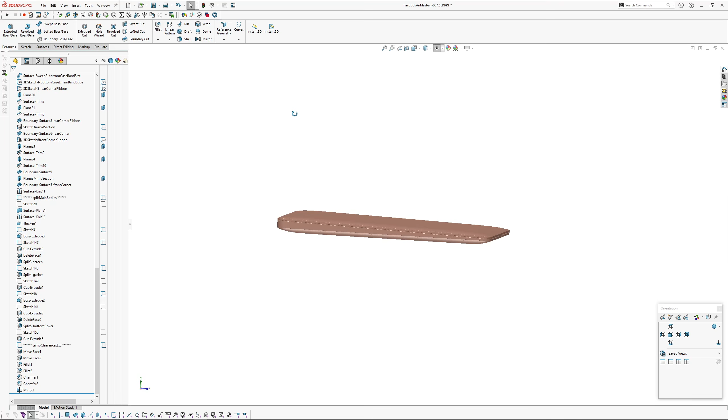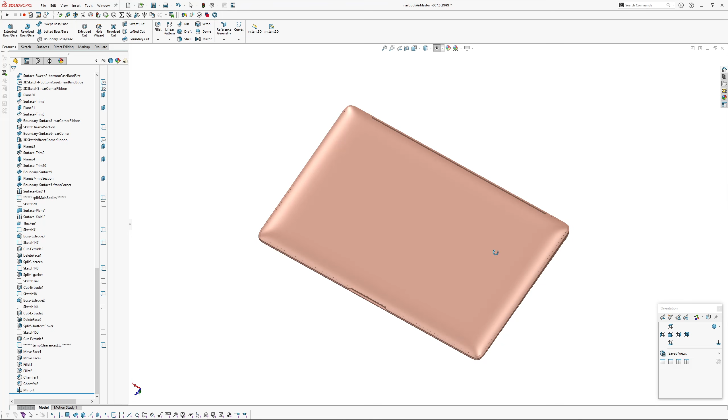Got a video today looking at the M1 MacBook Air. I've had a few quieter days with work, and I felt like working on something geometric but also with some surfacing challenges. So I've modelled up the main exterior form, and I'll probably follow up this video later with more details like the feet, and maybe populating the keyboard. We'll see how we go. Anyway, this is the result. I've tried to use G3 blends everywhere I can, so it's fairly smooth.

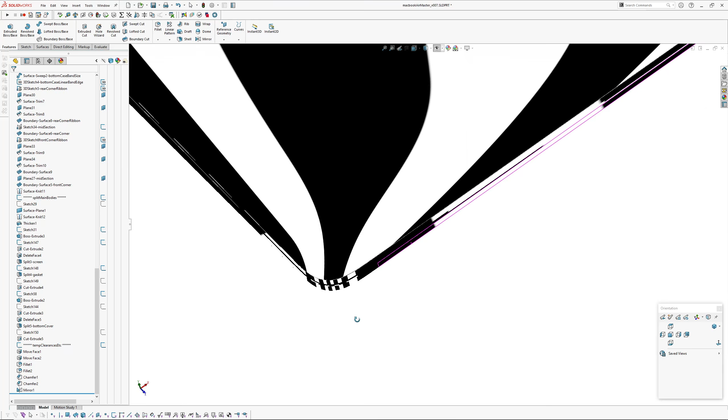As you can see here, this is the top, the lid, the screen running into the corner there. That's pretty smooth. The corners on top might look the same, but they're actually different, because one of the faces, the front face on this product, is angled, whereas the others, as far as I can tell, are perpendicular or normal to the desk.

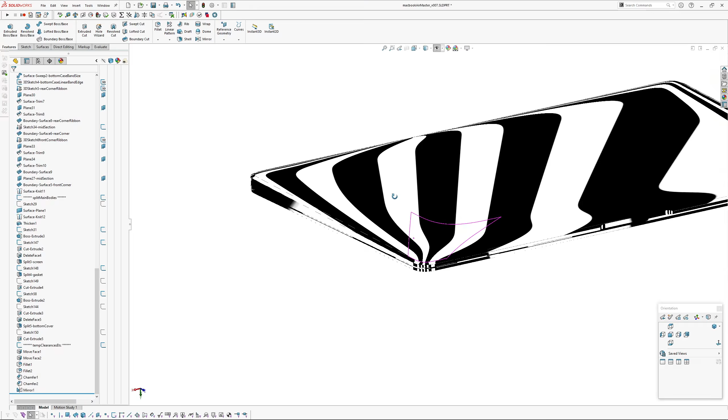So that's the front. On the back, I've also made some other discoveries about the product, which I'll get into soon. This edge band isn't actually continuous, there's a crease that runs between the edge, the outside case, and the bottom cover around the corners, whereas around the sides here, as far as I can tell, the edge and the bottom case are one surface, or the same surface split out.

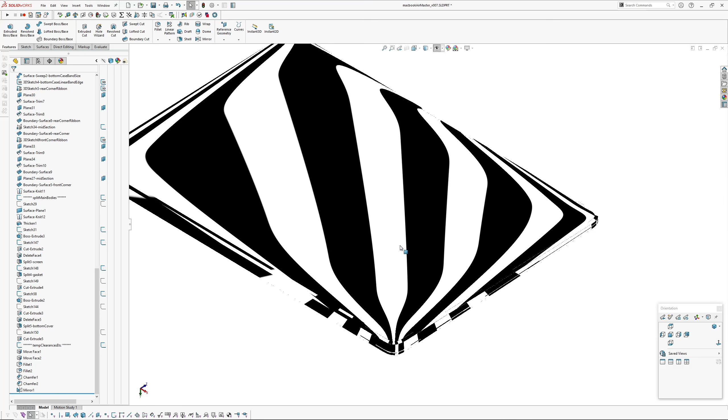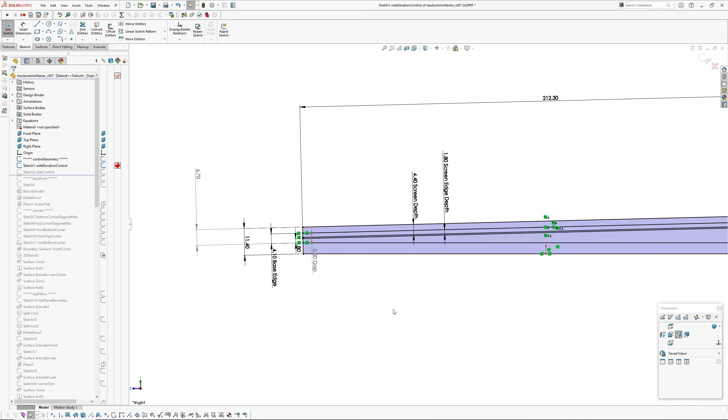Okay, I'm just going to roll back up through the tree and roll forwards and explain what I've done. First thing I did was survey the product and capture the main edges, planes, pivot for the screen, etc. I measured this as well as I could with a straight edge across the top and a vernier caliper, to try and find out where these virtual centers were, because obviously the top and underside roll up, and I've named everything in there. I'll upload this file in case anybody wants to have a look.

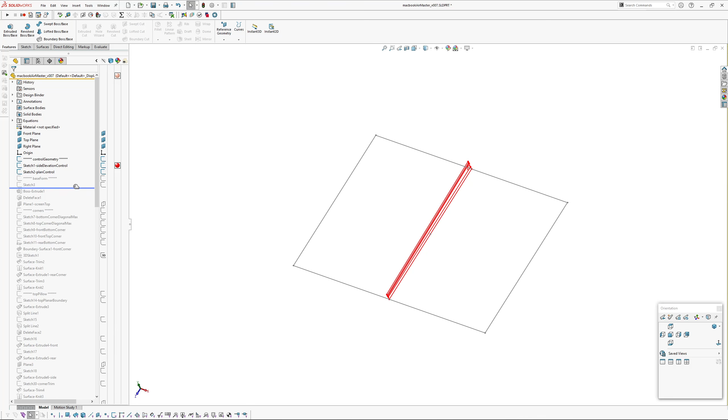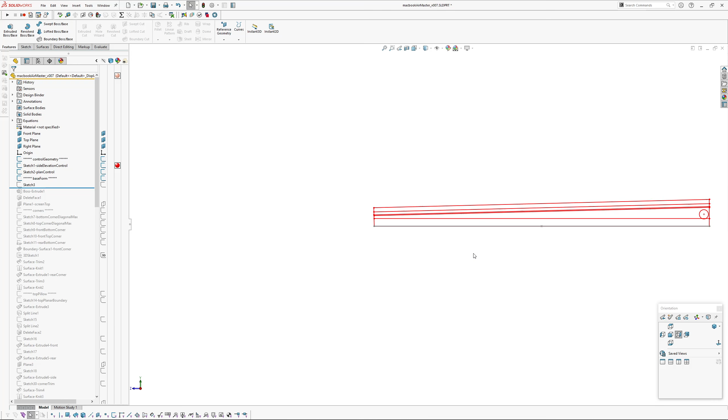So then after that, the side elevation control, I've got a plan control which is the width of the product, and then I've got into the base form. Some things I learnt, like I mentioned before, the back edge is vertical, the front edge is not, it's on an angle. It looks to be normal to, or perpendicular to, the plane that the screen lies on. Little things like this can catch you out when you actually start building the corners, because that face is angling over.

Okay, so first thing I did was create a boss extrude. I used that control sketch, converted some entities and extruded out this boss here, using this corner point of my plane control. And then I turned that into a surface body by deleting a face on the center line. And then I have defined a plane for the screen top, so that's basically a plane that's on that surface.

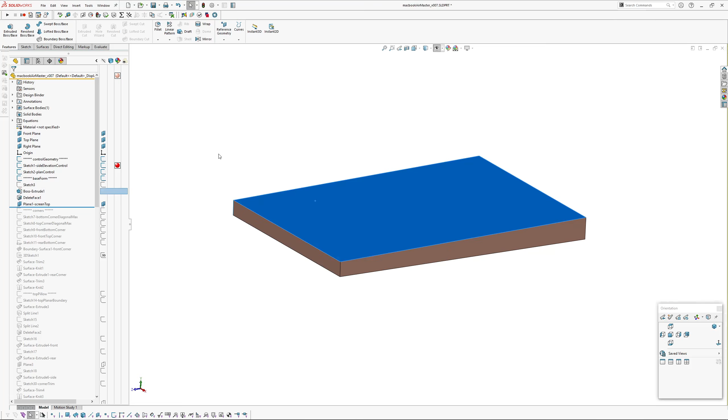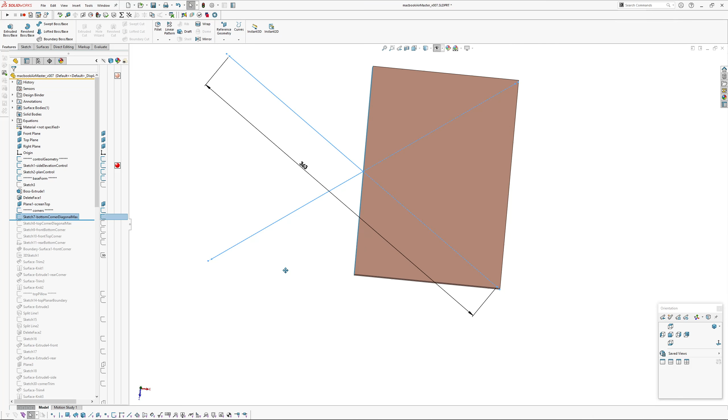Next up is the corners. With these sorts of G3 corners, it's quite hard to measure how full or how flat the corners are just by looking at them. So what I've done is taken a diagonal measurement across the product, which is like a diagonal maximum. I'm using this point to bring the corners back through. I'll show you in a second.

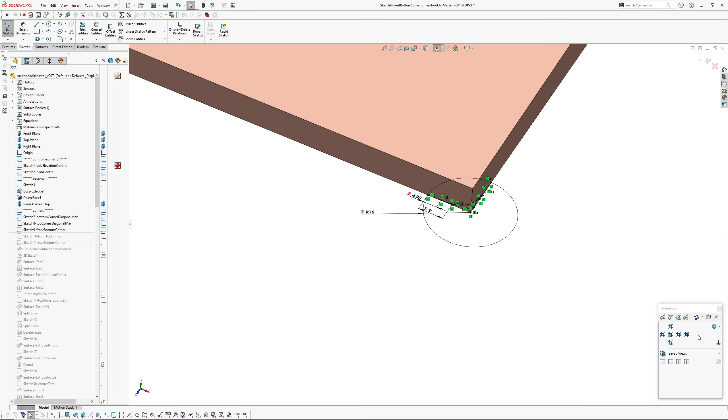So because the top and bottom are different, because of the angle on the front face, and also because the top is on the angle, I've had to create these measurements on two different planes. Okay, so the front bottom corner is a G3 corner, so it is a degree 7 style spline, so that's got 8 CVs, and I have this setback radius here.

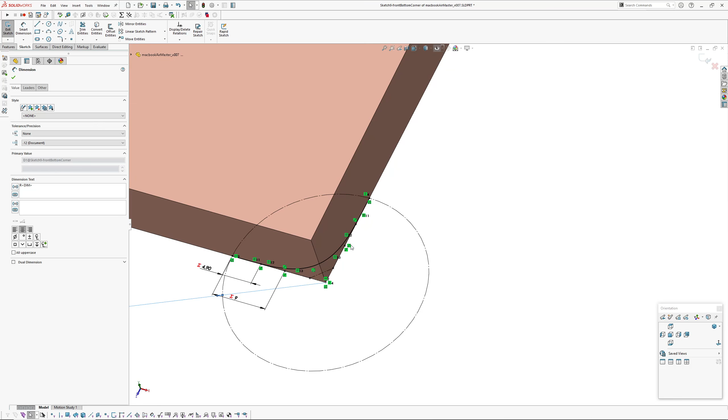From the virtual corner, I have set back, this is where the corner starts, where the edge transitions from a line into the spline, and I've treated that to be equally in both directions. And what I mentioned before about this diagonal measurement, so that's that line there. I measured across the product, that seemed to be its maximum diagonal distance. So I have constrained this style spline to meet that point there, which controls the fullness of this curve here.

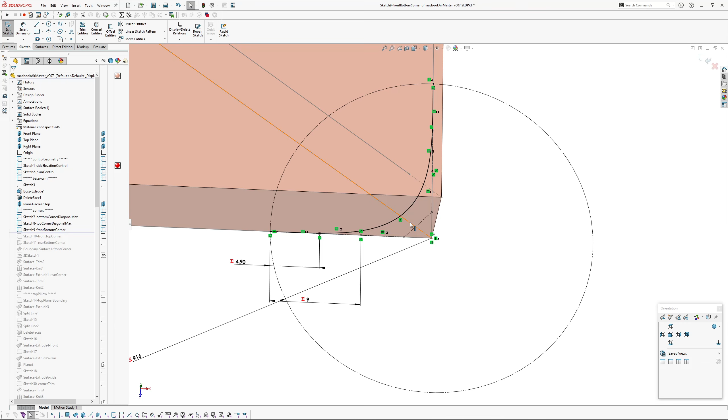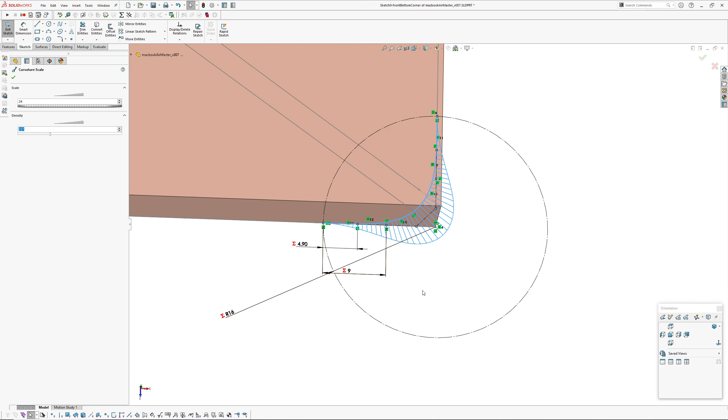And then I have an equation, because these corners get set up elsewhere, which controls these dimensions here, and also the setback from the corner. Okay, and that results in a G3 corner, and actually I ended up in none of my sketches having to use a tangent or a curvature continuous or a G3 constraint, because everything here is matching to a line or a linear edge.

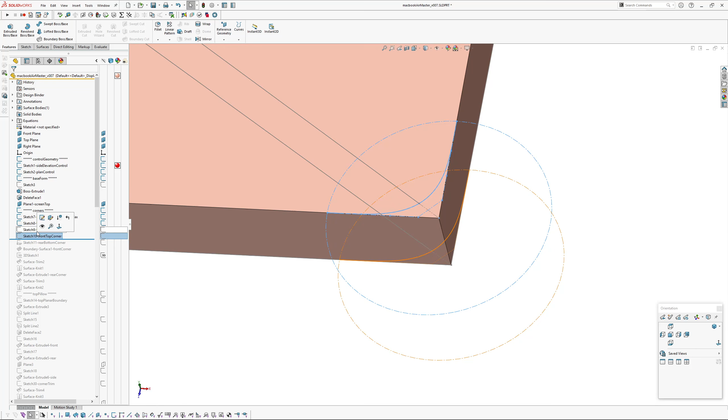So if you just make your control polygon segments collinear to the edge that you're matching, you don't need to use a G3 constraint. So I've built the top and bottom, I won't go into this other one here. That's why I had to share those dimensions, because this face here is canted over and this face is vertical, so these corners are slightly, ever so slightly different.

Whereas on the rear, for the rear bottom corner, I'm just going to extrude that up because these faces here are perpendicular to the top plane. The front corner is a boundary surface.

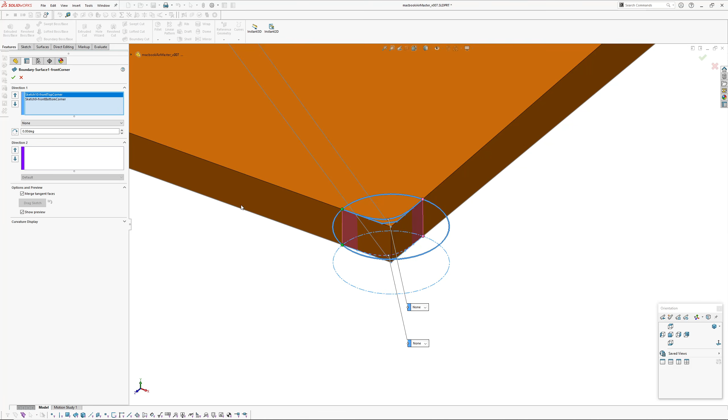That's just using those two sketches, and I haven't put any constraints, or I don't even have any curves in the second direction. I've created a 3D sketch and trimmed that back out into that main body. If we run a deviation analysis on those edges, I've got 0 degrees deviation there, so those are all good, even though I didn't need to specify that.

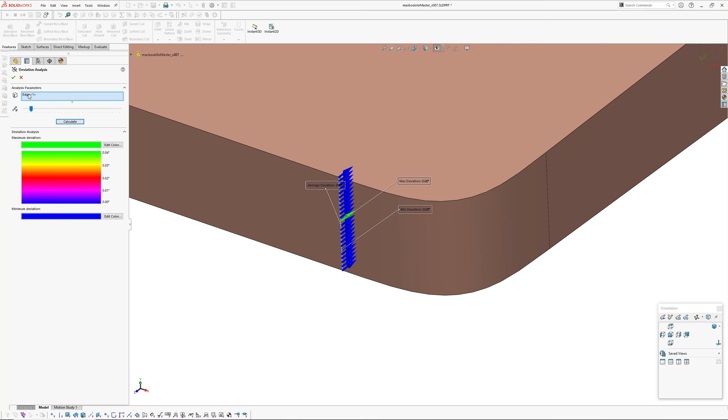I didn't specify that boundary or make it tangent. The rear corner is just a straight extrude, surface extrude, and then trimmed and knitted into that. So that's the main blank form with G3 corners.

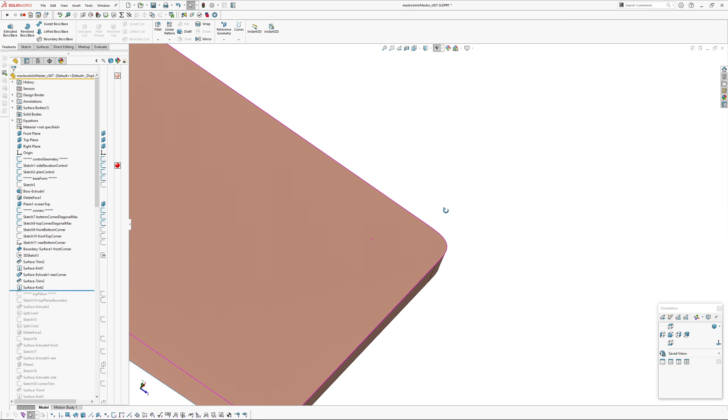Next up is the top pillow, so the pillow on the lid or the screen, whatever you want to call it. So again, to measure this, like the break point, because the exterior of the screen is a planar surface in the middle, at some point it breaks and then it turns into a G3 surface.

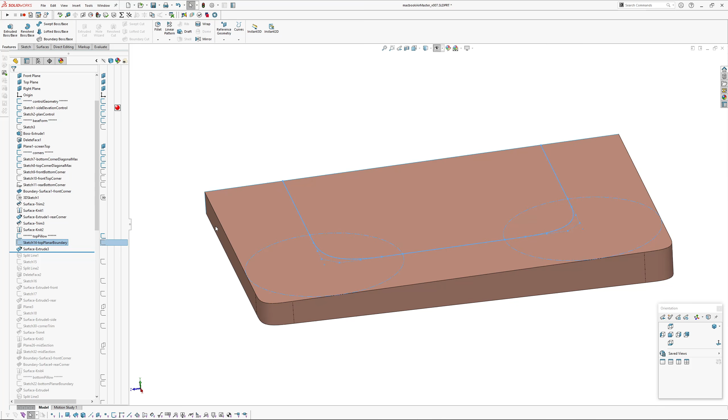So to figure out that distance, I lay a straight edge across the top with strong backlighting so I could see where it was touching, and then I basically added some more, because with G3 surfaces you always need more distance to allow the surface to curve. So that is an equal setback from each edge, 40 millimeters.

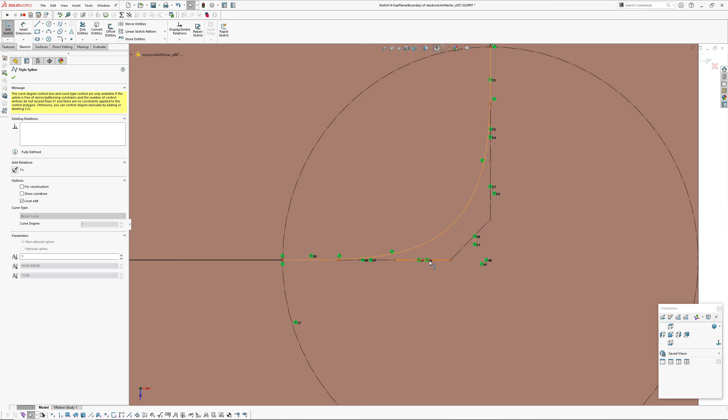Again it's a degree 7 style spline, set up like the outside corner, except in this case I've made each of the control polygon segments equal length, so there's no other constraint or dimension controlling that. I did that because I played around, changing it and making it a little bit pointier, but it didn't actually have a massive effect on the form.

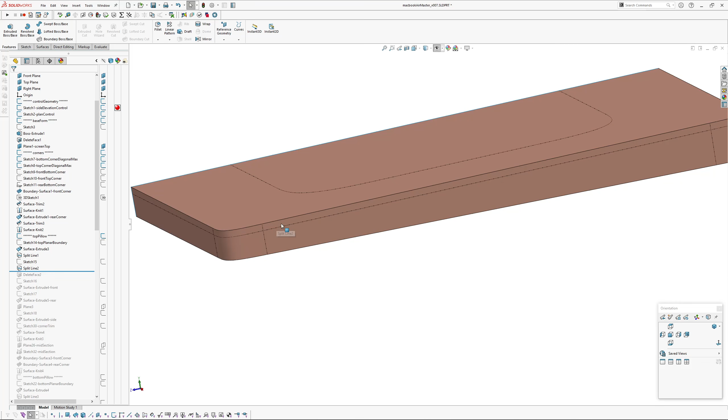Then we've added a split line to the top, and next I'm going to add the split line for where the edge is, for where the surface runs down to a sharp edge on the exterior. So another split line, and then deleted those faces, and then I start adding some surface extrudes.

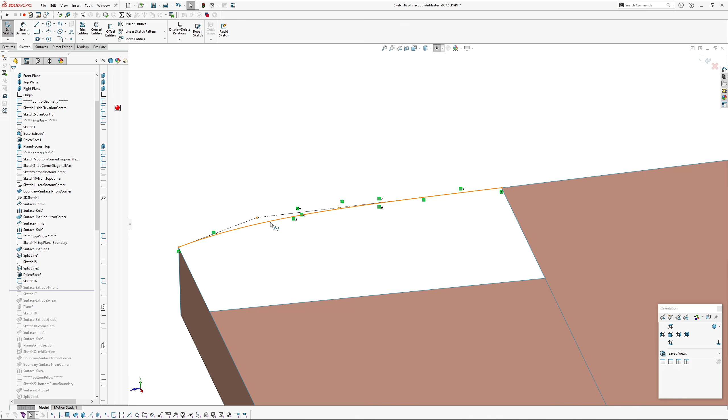The last CV here is the free one, and that's G0, so that's coincident to the edge here. And the other 1, 2, 3 control polygon segments are collinear to that edge there. I've made them all equal, just because I didn't have a way to measure this angle on the product, so I thought I'll just make these all equal.

And the result, it looks okay. So that, we just turn our edges off. That transition from the planar face down to the edge is quite smooth.

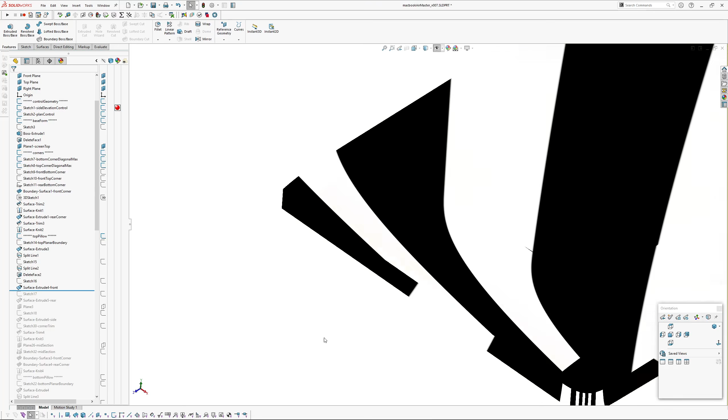So as I said, that's an extrude, and then I basically repeat the same procedure along the other edges. I've extruded these up to this corner vertice on each, and then basically what I'm going to do is trim these back with a sketch, going from the corner of this inside to this corner here.

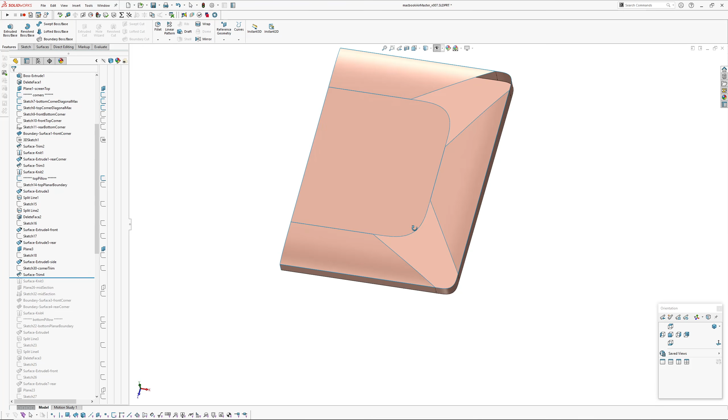I know in some of my earlier videos with pillowed surfaces I did try cutting this piece of surface off and then adding some other geometry in there. I tried that with this, but I actually got just as good a result by going out to the corner like this, and didn't end up with much pinching in here, which is what I was wary about when I did those experiments, like cutting this right back.

So, knitted that together. I've created a midsection curve, which you can see here, to control this corner surface a bit more.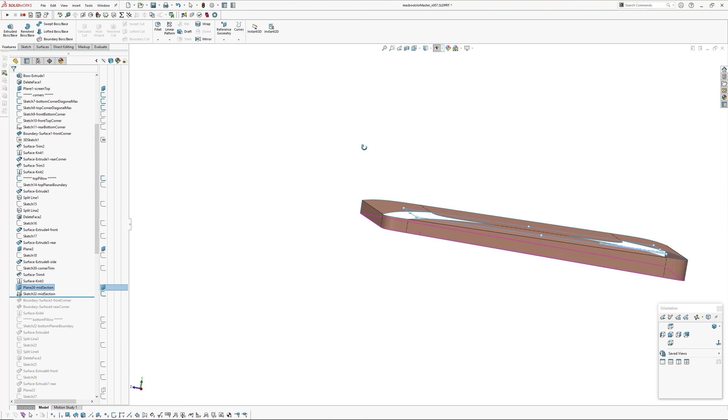So that's basically, I've created a plane that's offset from the top, and then that plane has a couple of intersection curves, intersecting these extrudes. Again, did need to use G3 constraints to get this style spline to match up with this linear element here and here.

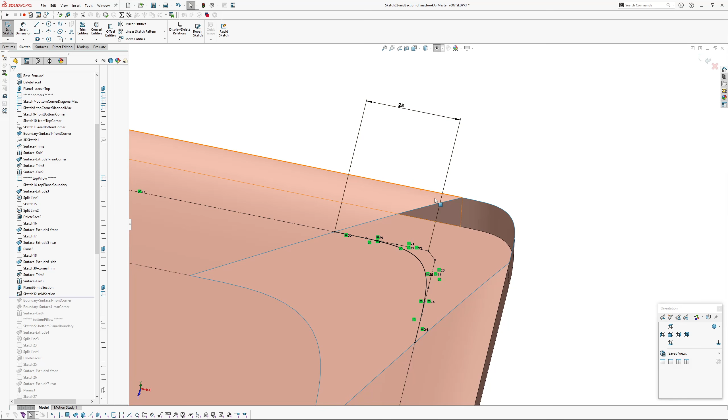So I've done the same up here. I've got a few dimensions there because this did actually affect the form a bit, so I can change the fullness or how flat that style spline is. Those style splines are set up the same way as that corner there. And then the boundary surface is pretty straightforward.

In this direction it's just these two edges, the edges of the extruded surface, and in the other direction we're tangent to the planar face at the top, and then just got G0 on this outside edge.

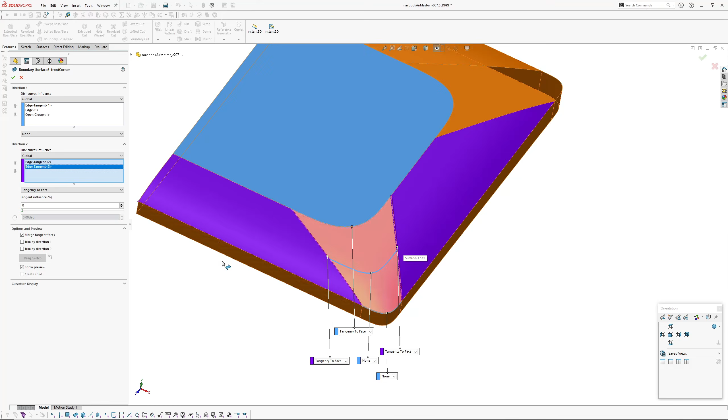And then I've got the midsection. After playing around, I found I got the best result having tangent influence to 0 on these ones, and that's probably because they're influenced by this mid plane curve, so they don't really need tangent influence there, and then tangent influence on this boundary at the top here up to 100%, and then the same over here.

Okay, so there's our result with the top corner. I'll just turn the edges off again.

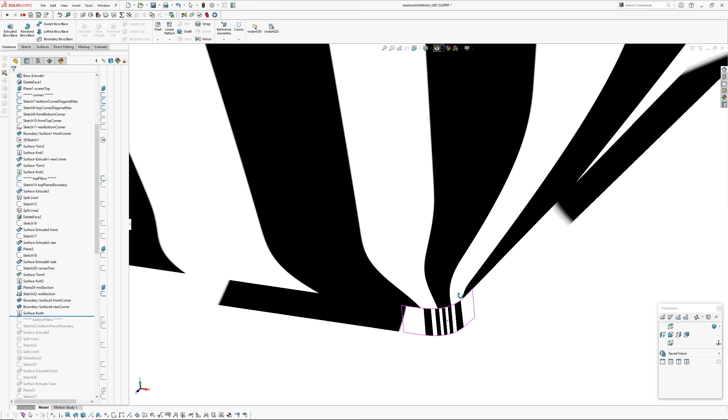So that works quite well. Yeah, no pinching, which is nice. I think that's because this outside corner is G3 as well. Everything I've tried to set up is G3, which means that's translated quite well into this corner surface.

Right, let's get onto the bottom pillow. I might just skip... oh no, the bottom pillow is actually a bit more complicated. Okay, let's have a look.

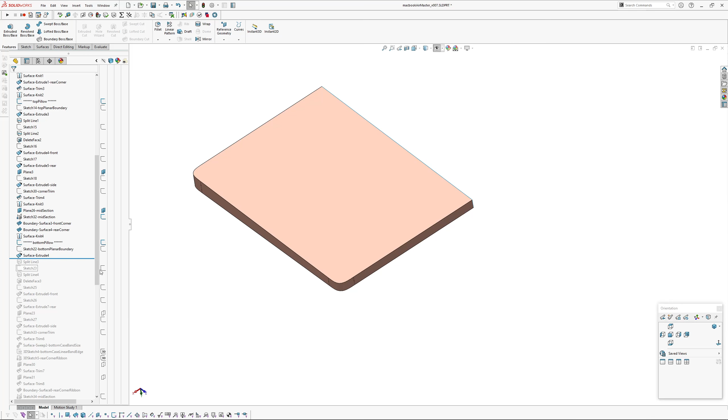So to start with, I've got the same sort of setup as the top, so I won't go into detail about how I've created this inner boundary for the planar bottom for the setback. And on the side, that is a split line, through where the hard edge is, where the pillow runs down to the hard edge, and then I've deleted the faces like I did on the top.

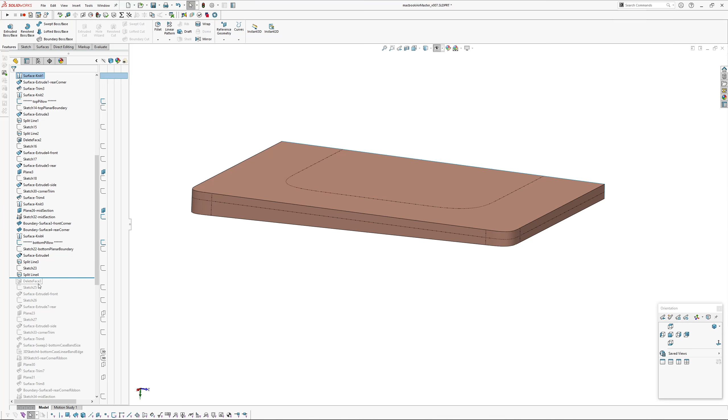Okay, and then I have that series of extrudes like the top, and then I trim back. Okay, this is where it starts getting a bit different.

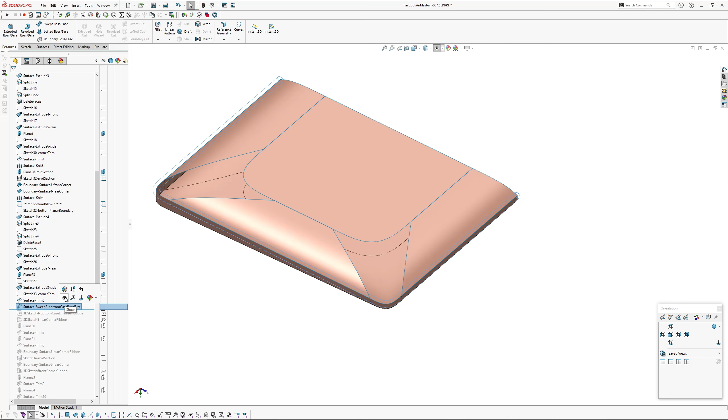So on the underside of this product there is a split between what you might want to call the main case and then the bottom case, and I have controlled that with a pipe. So I've got a pipe setting a distance back here and then intersected with the surface here to give me some of these 3D sketches here.

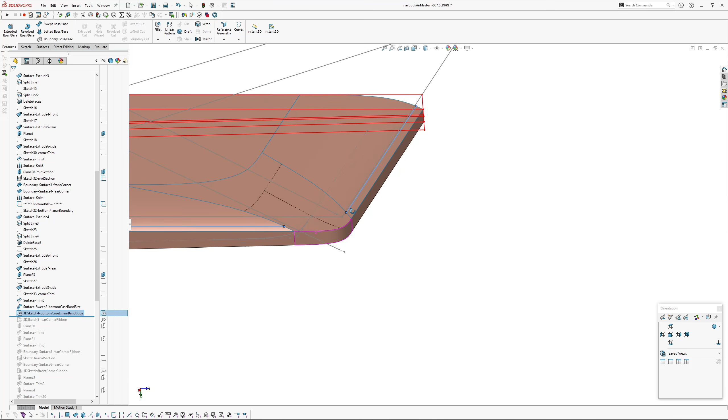I could have done it with a plane, but I decided to keep it as a 3D sketch in case I changed any of these surfaces. So these were, maybe I changed this extrude so it's slightly different to the others.

But I'll just jump into another file to explain this issue. Okay, so on an earlier version, this corner I was setting up pretty much the same as the top, except it's got more of a pillow on it.

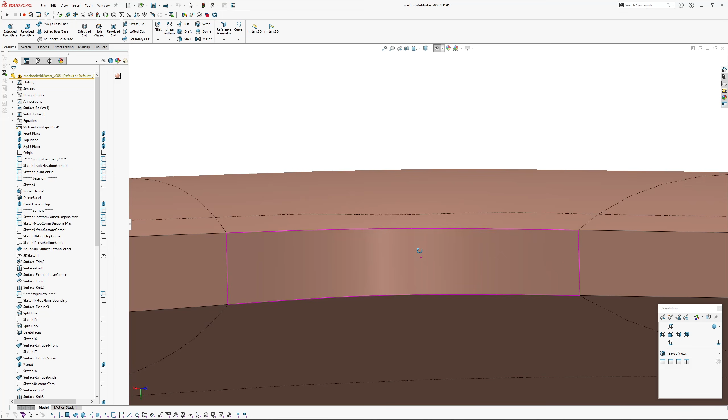So when I was trying to set up this setback here for the split between the main case and the bottom case, when you look in here, you can see that this has got a big wobble in it.

And I thought, okay, well, maybe they just played with the form here until they got rid of this wobble. So they got a consistent, nice, even edge there. But I tried doing that and I couldn't succeed. I was always having a bit of a wobble on this edge here.

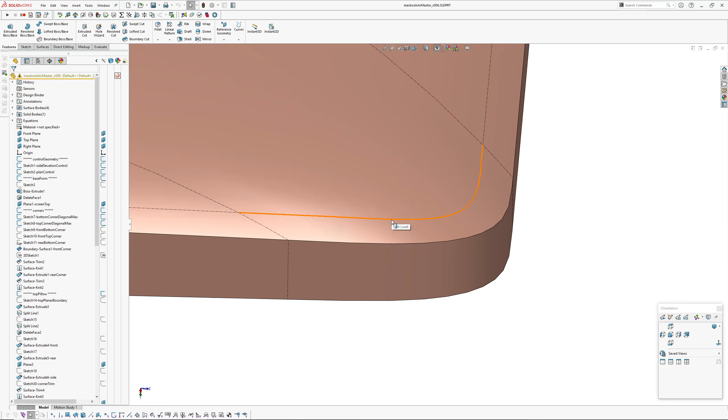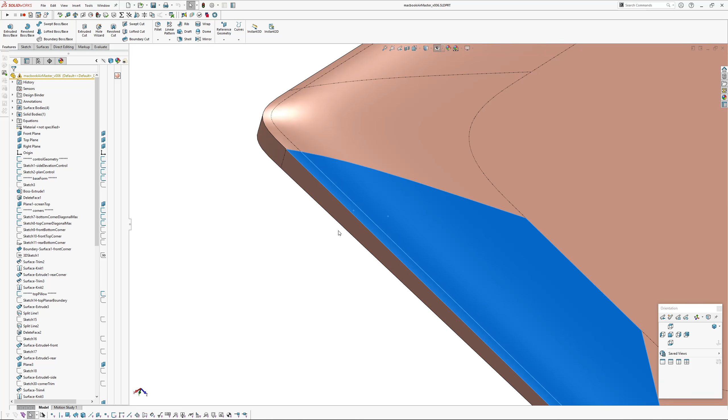So I had a really close look at the bottom of the MacBook Air and noticed that there is actually a crease on both of the corners on the underside of the MacBook Air between that pillowed face and this face. So they're actually separate surfaces. Whereas as far as I can tell, this surface and this surface are the same surface, they've just been split.

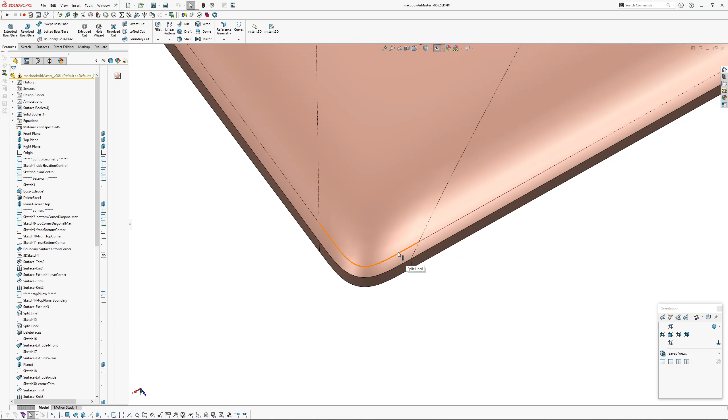So I thought, okay, well, maybe Apple, for consistency, made this edge here planar and then made that surface, and then made that one without trying to keep tangency across here. So I tried doing the same thing. You don't really notice on the product because there is a 0.05 or whatever gap across here, plus there's a screw here and then there's the foot, so you don't really notice.

So my solution was to add a 3D sketch between those, like the setback, the split between the two parts that I was mentioning. I created this corner ribbon surface.

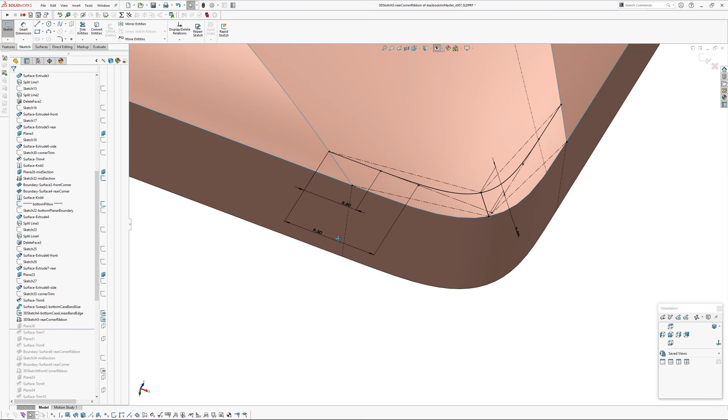I'll just hide the curvature graph. And it's a little bit complex looking, but I've created a G3, or a degree 7 style spline, as a 3D sketch. And all of the control polygon segments are collinear to these lines here, which means that is effectively a planar section, assuming these two lines lie on the same plane.

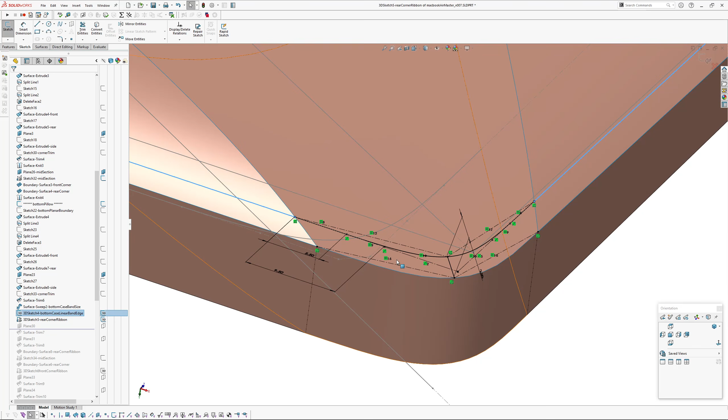The reason I didn't build this on a plane was because I wouldn't be able to tell what this angle was. I'd be chasing myself around and around in circles.

So I've got control over the depth of this ribbon here on the corner. And I decided to do that because some of my measurements actually look like this corner is slightly different to the dimension on the side here.

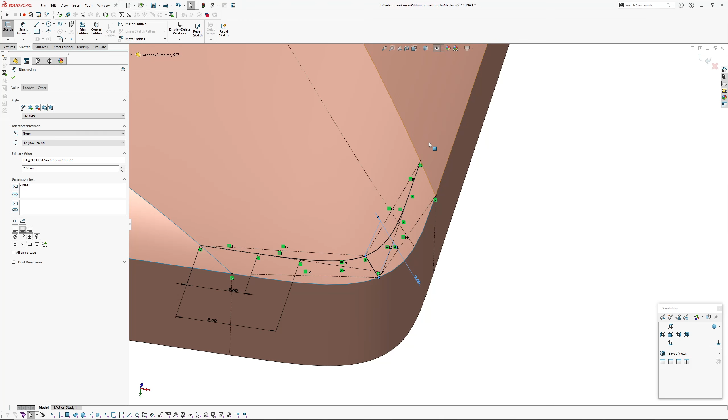I've probably done that for visual purposes. So I can change that dimension there. This stays planar effectively, but this angle here, or this segment, changes. All makes sense in a second.

Okay, so to put a surface in, I've trimmed back these ends of these extruded side surfaces, and then I've made that ribbon surface there.

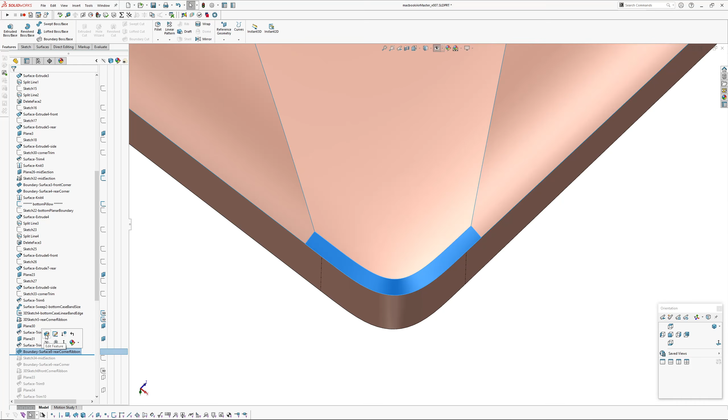So that ribbon surface is tangent to the main side surfaces on each end, and then I have both of those elements of that 3D sketch controlling it, and that is effectively planar, the result, that top edge. So we try and make a plane through it. Oops.

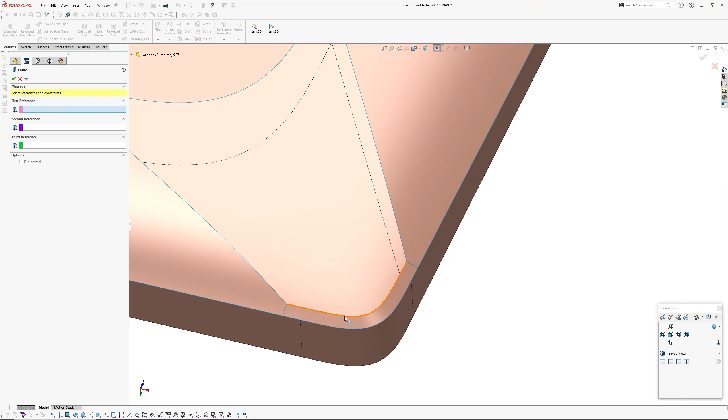Okay, so that's nice and controlled now, there's no wobble in it.

I'll just roll forward and put in the main corner, right, which is set up the same way as the top corners. And now if I turn my edges off and roll forward to knit this all together, you'll be able to see the crease.

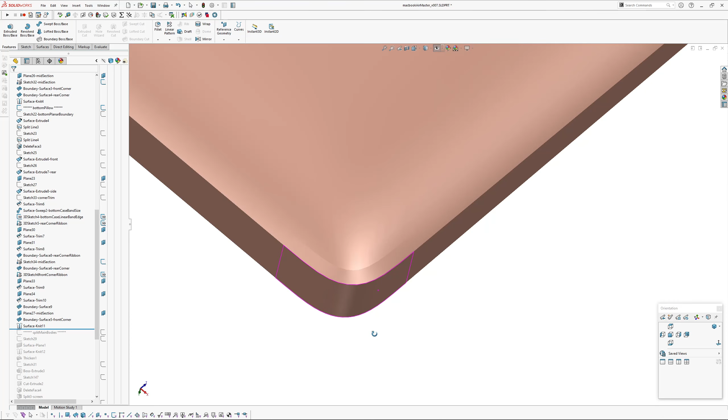If you have one of these products and have a good look at it, you can actually see that this edge here sticks up ever so slightly above the pillow or the main corner behind it.

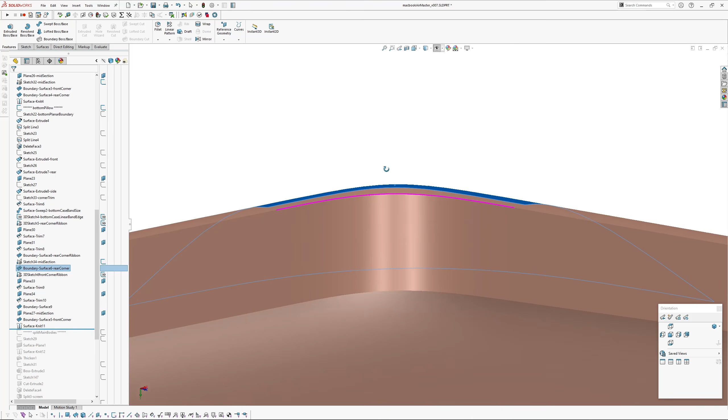So now if I turn the edges on, you can see there's no wobble there anymore. I know this is super detailed and a bit pedantic, but I guess someone was pedantic, because that's how the product ended up. I guess if you've got super smooth forms on fairly controlled geometric shapes, you've got to be pretty controlled.

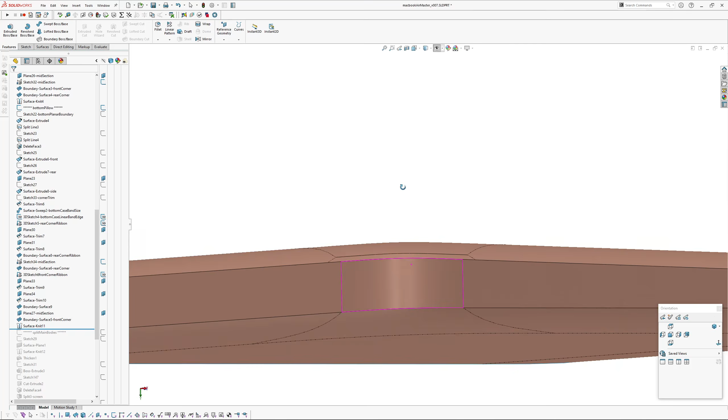Okay, I'm going to jump on now to something else. Oh yeah, there's the front one. It's the same thing, so it's nice and consistent, because we're going to split these parts out, and that's one of the split lines.

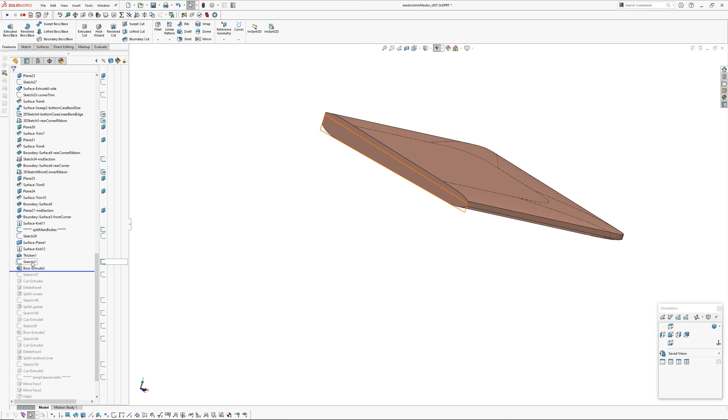Next up, I cap off the center to make this into a solid with a thicken, and then I'm going to split out the screen area using split functions or features.

To do that, I've created a solid extrude, which is basically the height of where the screen is, so the outside edge here, which is 1.8 millimeters down from the edge.

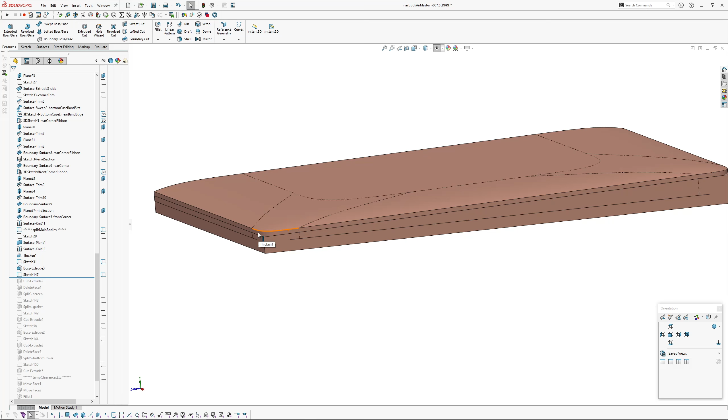And then I've added a cut extrude at the back there, because this screen comes down and round into the hinge area. I've deleted some faces off that solid body to turn this into a surface, because I use that surface as the split tool to split the screen off.

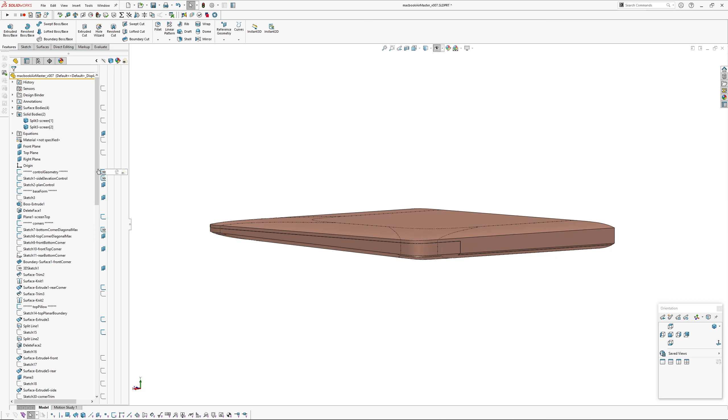So now I've got the screen isolated up here.

Then the next one is to split off the gasket, what I've called the gasket. I've created a body like a gasket, which I haven't done any detailing on, so I've just hidden the body. Next up is to split out the bottom cover.

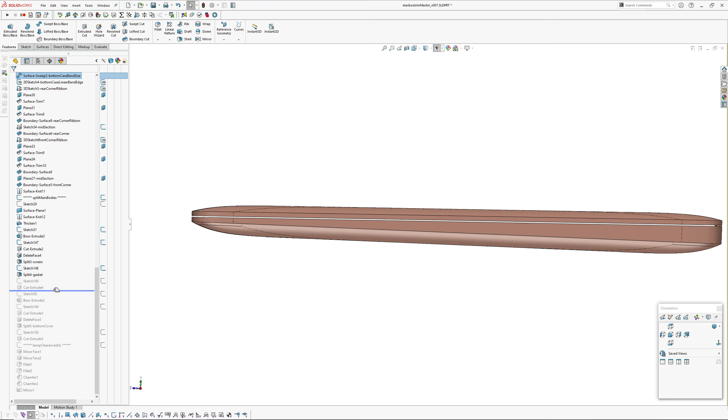So I've created an extruded cut to make this gap here in the bottom, then created a solid extrude, which denotes the split between the main bottom case and the bottom cover. I've cut that back because I just want this bottom cover to be a solid.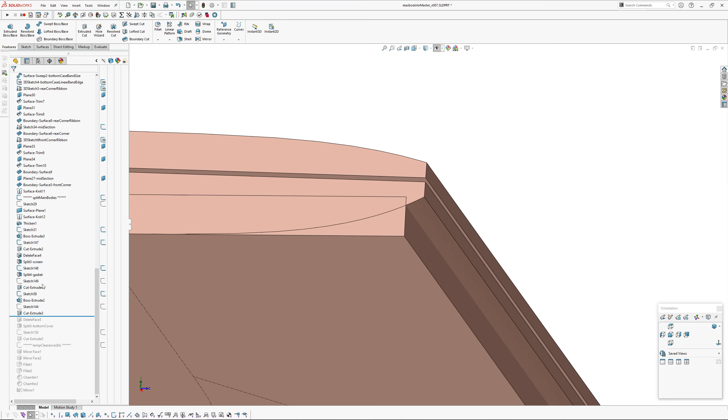I'm not trying to make a thin part at the moment, I just want to make a block, so that's cut back a nominal distance. Then I've deleted some faces again to turn that into a surface body like that.

And then I've gone in and used the split feature to split that body. If you haven't used the split feature before, I'll show you. So this is one solid body here, and then I've got that surface body.

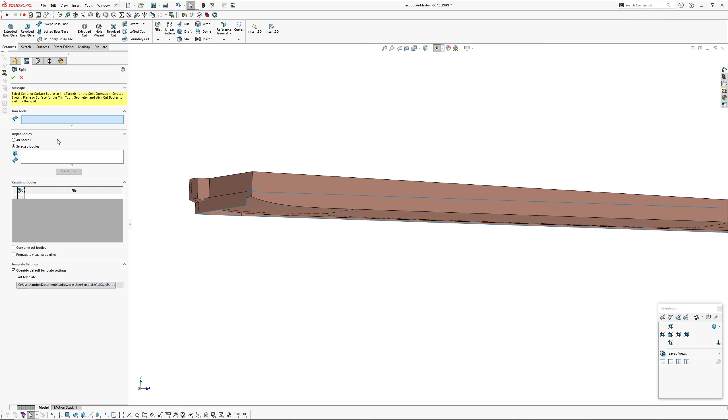If you go Insert, Feature, Split, and pick your trim tool, which can be a surface or a sketch. So there's my trim tool, and then the selected bodies to trim or cut, sorry. Then you go cut bodies, and that splits it into two.

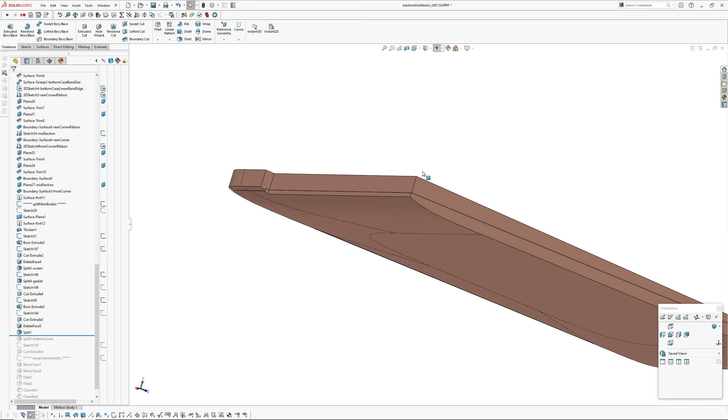I'm going to keep both those, and then you hide the surface, so now we've got two bodies. Those surface faces that we used to split them are coincident, so that's matching up line to line everywhere. I'll just delete that one because that's going to cause me problems with my other features.

The last thing I've done is added the little finger cutout at the front for the screen.

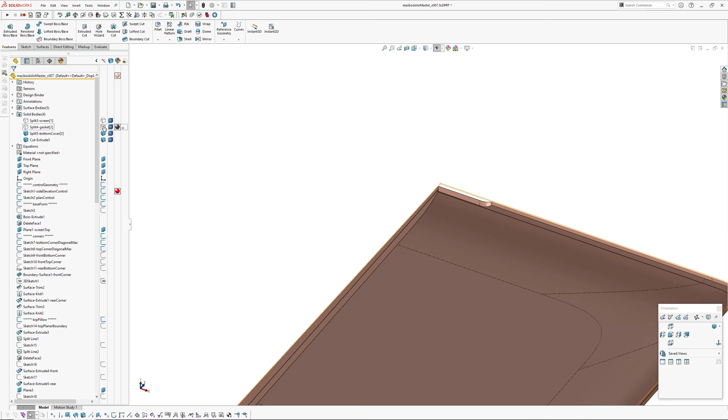I've added a few clearances using move face, just to add a clearance between the bottom case and the bottom cover. So if we turn the edges off, you can sort of see why I didn't really notice that crease at first, between that face there and that one.

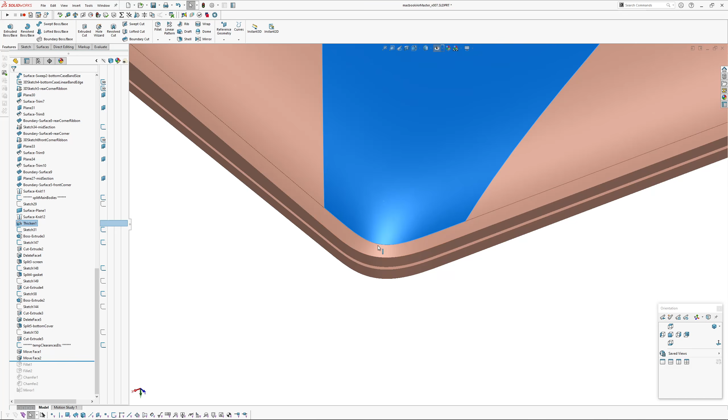So these faces here, those are the same surfaces, these surfaces aren't on the bottom. But what that means is you end up with a really nice, equal, deliberate looking result. I think that's the main thing — you don't want to have a big wobble in the bottom here, because someone will spot it, someone like me.

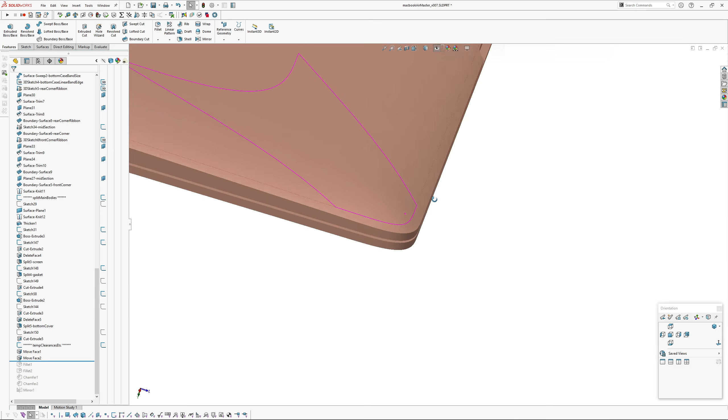Anyway, just added some fillets and mirrored it all across. So there we go, that's the first stage of the MacBook Air M1 modelled in Solidworks 2020.

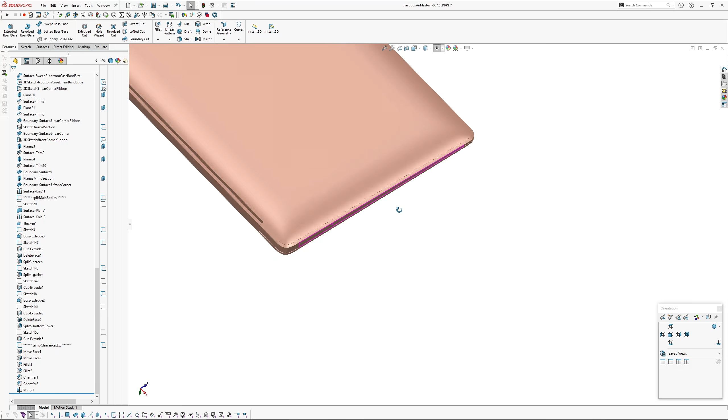Yeah, so hopefully I'll follow up with another installment when I've got some more details, like the feet. It looks like the feet have some sort of poka-yoke design, because I thought the foot would be common across all corners, but after looking online it looks like there are little lugs to locate the feet and rotate them the right way around. So anyway, we'll cross that bridge when we come to it.